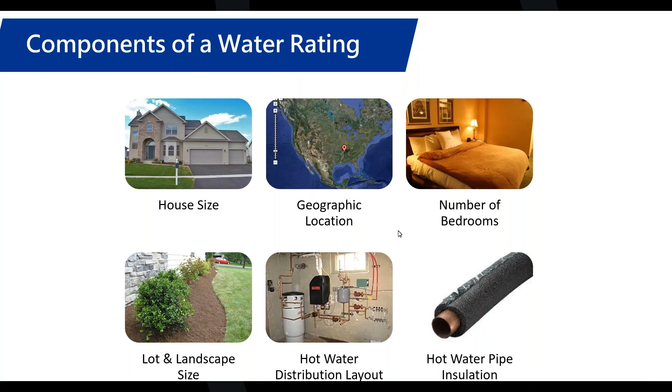Also, the shower heads, kitchen faucets, lavatory faucets, clothes washer, toilet flush volume, water softener, dishwasher, excess pressure, and irrigation, pool or spas are also considered in the water rating.

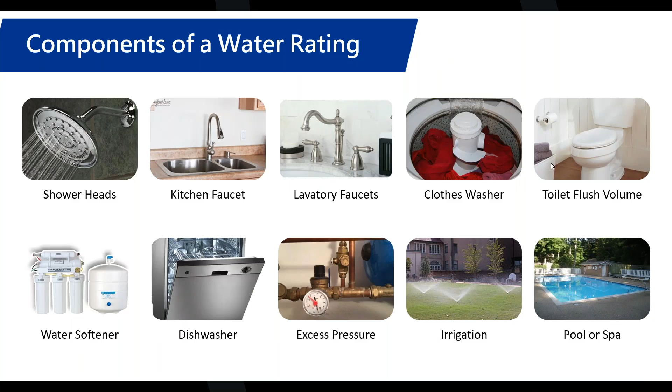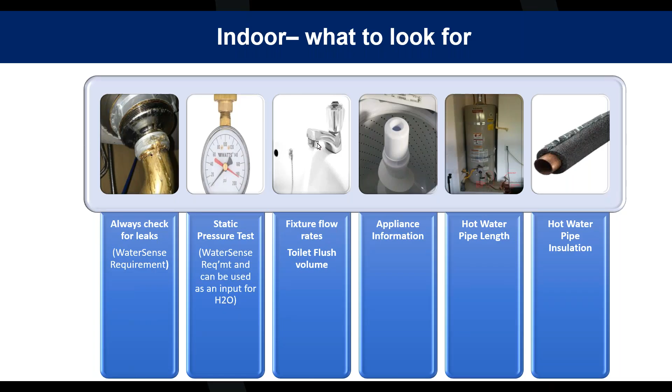So when you're doing your indoor inspections, these are what you're going to be looking for. You're always going to check for leaks throughout the house, and that is an absolute WaterSense requirement. There's also the static pressure test, which is a WaterSense requirement, but it can also be used as an input for HERS H2O. So fixture flow rates, toilet flush volume, appliance information, hot water pipe length, and hot water pipe insulation are all considered.

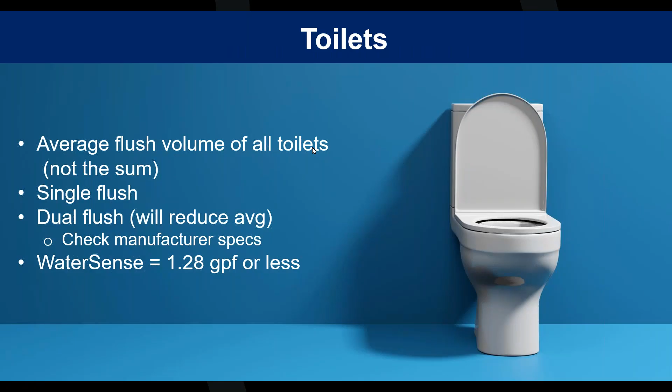So for toilets, the average flush volume of all toilets is considered. You have to identify whether they're a single flush or a dual flush, which will reduce the average. And you do need to check your manufacturer's specifications. WaterSense equals 1.28 gallons per flush or less.

Now there's two options that you have for faucets and shower heads. You record the flow rate printed on the fixture, or you find it in the manufacturer specifications. You can conduct a flow rate test for lavatory faucets. The spreadsheet allows for entry of standard or low flow, which low flow equals 1.5 gallons per minute or less.

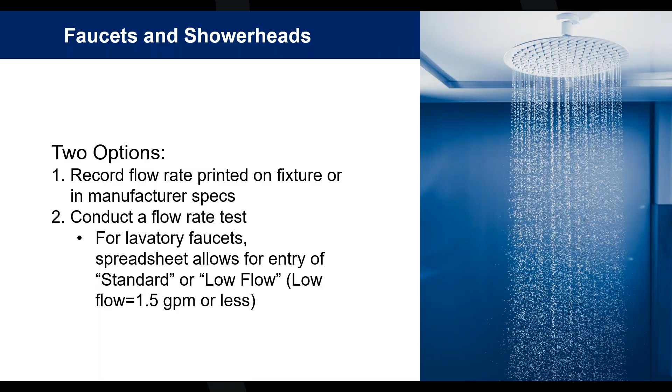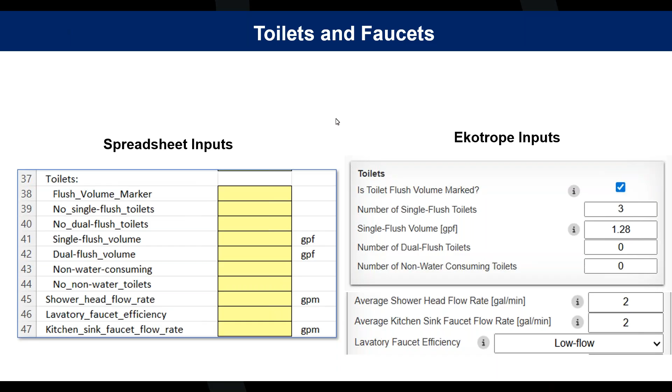Now on the spreadsheet, we put the spreadsheet inputs and Ekotrope side by side so you could compare them. And you have to be able to input the accurate information. So single flush volume is gallons per flush, dual flush volume is gallons per flush, and you input those on the spreadsheet. You identify the number of toilets and the single flush volume. And then as you go down, there's a drop box which you can click onto and select if it's low flow.

So, spreadsheet inputs: rows 49 and 50 are required, and you need to enter rows 51 and 52, or you go to the label and input 54 through 59 with the information.

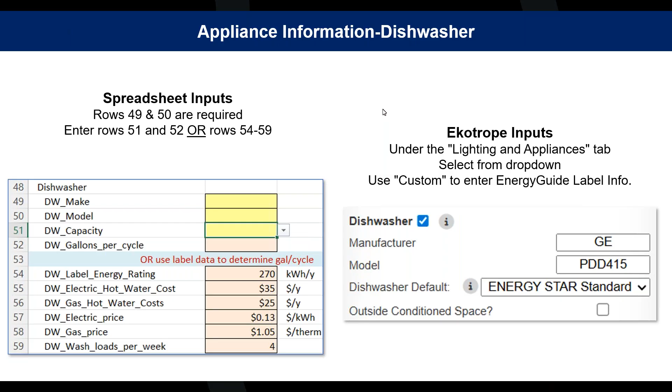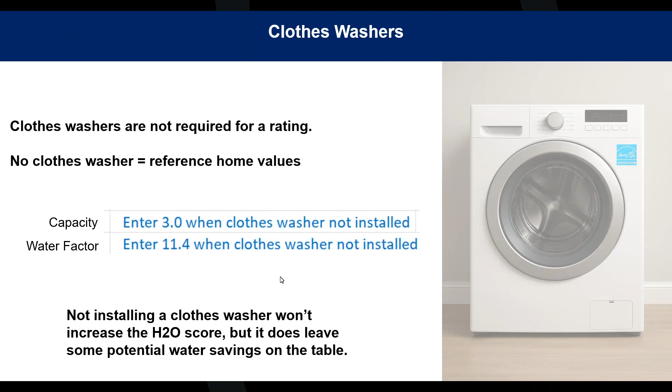Clothes washers are not required for a rating, and a lot of builders don't automatically put one in, which can be confusing. When there is no clothes washer, you have to reference the home values: enter 3.0 for capacity and 11.4 for the water factor when the clothes washer is not installed. Not installing it won't increase the HERS H2O score, but it does leave potential water savings on the table, so encouraging builders to install clothes washers might be a good thing.

And then on Ekotrope, if you are installing one, you need to put in the make, the model, the integrated water factor, and whether it's an Energy Star property and a front load. Again, you have a drop-down box where you can click the accurate information.

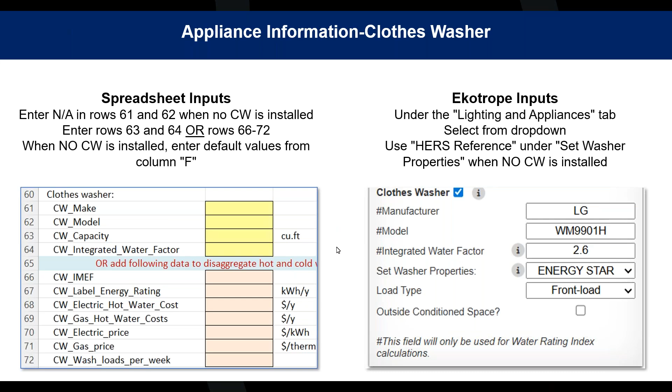Next up, we're going to discuss the outdoor inspections and testing protocols and our methods. And Ryan, I think I'm able to advance.

So what we're looking for may feel like you're a fish out of water, because most of you are used to being inside, not necessarily looking at irrigation and landscaping values. But here we're looking at landscape design, and determining through that the irrigated area. We're going to address the irrigation controllers, determine if there's a swimming pool and/or a spa, and there is an option to determine the irrigation flow rate.

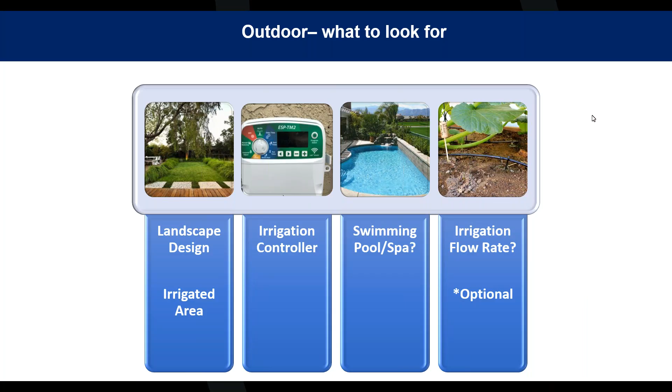So the key components of an irrigation system: what we're looking at here is the controller. A lot of times that controller is going to be in either a garage or a utility room. It requires power, so it's near an area with electricity where it can be plugged in. It's typically out of the weather since it's a piece of electronics, not usually on the outside of the home. It shows you the number of zones you've got and allows you to toggle through them, and then you determine if it's a smart controller. We'll elaborate on that in a moment.

So the emitters - I've got a better slide next that will give more indication of what you're looking at and able to identify - but those are either above ground, below ground, drip, pop up, and/or rotating.

Then your backflow device. Now, I've never seen one like what's depicted here, but I assume this is in an area that doesn't have heavy freeze. A lot of times you'll see that backflow device in a control box, and what that does is, when the system is no longer pressurized and sending water to the planting areas, it keeps that water from sucking any chemicals, pesticides, or lawn care items back into the system and getting into your potable water. So it's good for avoiding that.

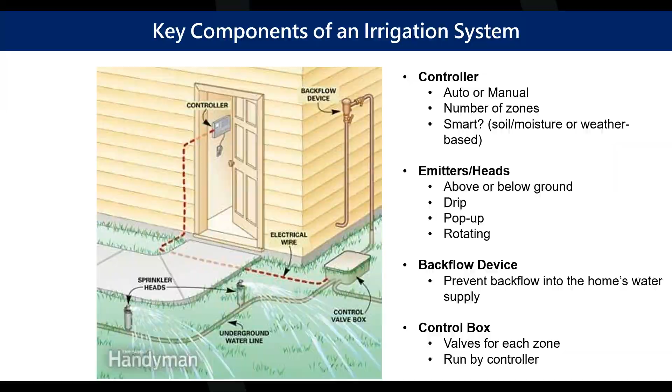So again, here's some of the examples of what you're looking at in the wild. The drip irrigation, very efficient method of watering. Essentially, you've got tubing that a lot of times gets buried under mulch to retain some of that water, and then you might see some of the emitters come up. That essentially is putting water right at the root system of the plants. Like I said, very efficient, way less evaporation.

Subsurface drip irrigation, I've never seen it, but I do know that in my area there are some soccer fields that kids are playing on these days that are watered with that. Essentially, they're putting down the drip irrigation underneath and then laying the sod on top of it to avoid what you see in the right here, those pop-ups. Those could be a real ankle buster if you're putting it into a sports field.

But essentially the one on top here, that one does pop up, and then it's kind of a static spray. You can see it's designed to get into that nice little niche rectangle there, and you do see some of that water flowing onto the hardscape there. The one below that will actually be on a rotary head that's spinning, and it allows you to shorten it, fan out, and decide the distance that water is going to throw. But these are not as water efficient because once that air meets the water, there could be some evaporation that takes place.

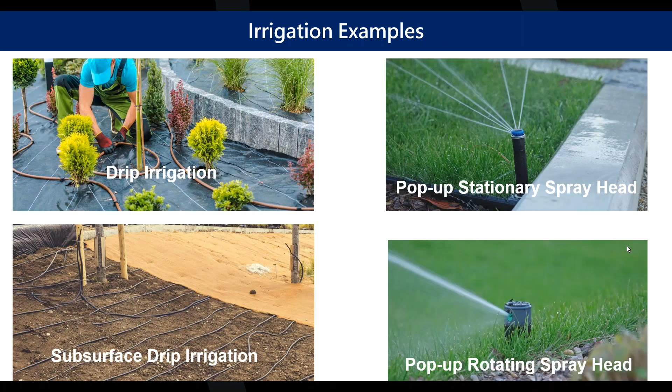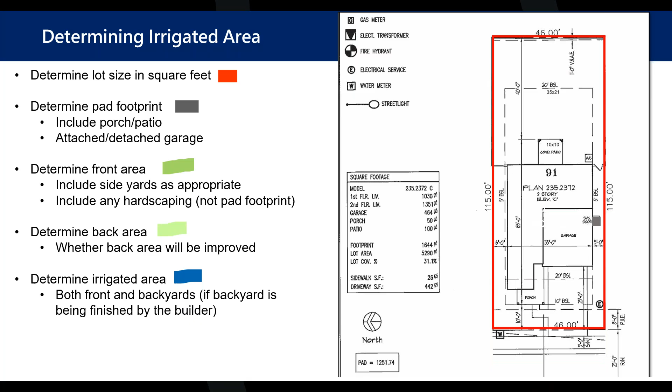All right, advance, there we go. So what we've got here is a very simple plat for us to work with. I've got two different examples of this for determining our irrigated area. So what we're looking at here is just a nice, pretty rectangle plan, and everything that's going to swoop in here - this is the perimeter of our property. Then we've got our pad footprint, so that's where the house is on the plat there. So anything that is foundation or slab, that's what this gray area is here.

And we're going to bring in our front area. So that's anything that's including our hardscape, our landscaping that is going to be irrigated, your driveway, sidewalk, any retaining walls, things like that are going to be included in this front area. So that's the wholesale - everything that's how you determine where the front area is. And then we've got our back area here, same thing - it's just everything that's in the back that includes any of the area back there.

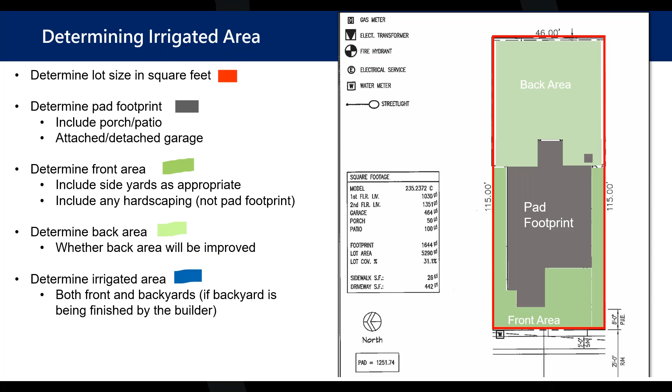And then this, it's a little globulous, you can see. So what this is broken down to is anything that you're expecting to be irrigated - it's either planting beds, it can be the entire swath of lawn, but this is just kind of broken down so you can get your mind around where you're going to measure.

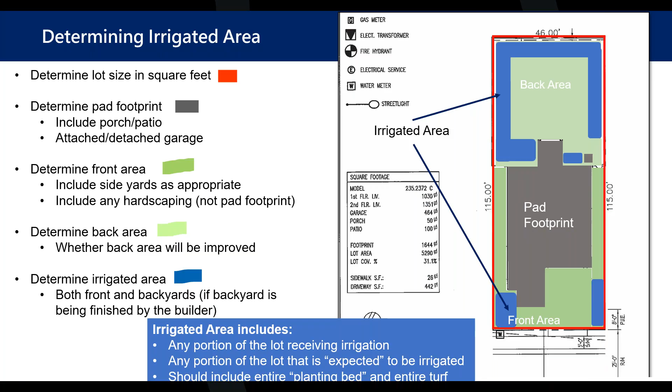So when you're looking at any portion of the lot that is expected to be irrigated, like I said, with those pop-up emitters, you're not just going to measure and stop there, because there is a throw that water has. So determining that - sometimes you're going to have to estimate, but typically where they're placed, they're going to have a radius or kind of a flat line where they're designed to reach. And a lot of times they'll be spaced so that they have a little bit of overlap. So when you find that last one in the row, go ahead and add a few extra, maybe 10 or 12 feet on the outside of that radius to make sure you're as accurate as possible.

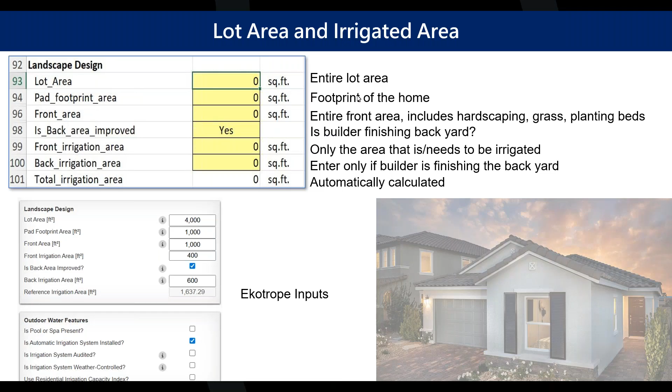Sorry, I had to clear my throat there.

On the right side you see our legend here. What we're going to go with is pink is our entire lot area. That pink is the perimeter outside, covering the entire perimeter of our yard.

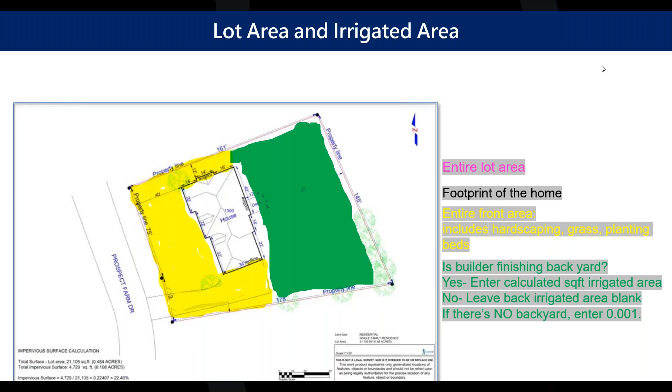Then we've got in black the footprint of the home. The yellow is the front area, which includes everything hardscaped, plants, lawn, sidewalks, retaining walls. Then the back area does take a little thought and conversation, depending on whether your builders leave it up to the homeowner to finish. Sometimes they just come and throw straw down and seed it to keep the soil in place, but if it's a more custom design, that backyard may be fully landscaped, lawn and plantings included in the house package. We'll go over the fields and how you determine that as we go forward.

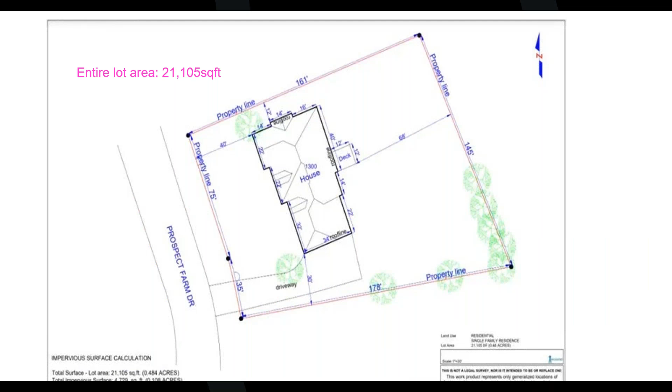So what we've determined here is that our area of the entire lot is 21,105 square feet. Please don't do the math for me here, this is just for the sake of the process. We're going to enter it in this top line, the lot area field.

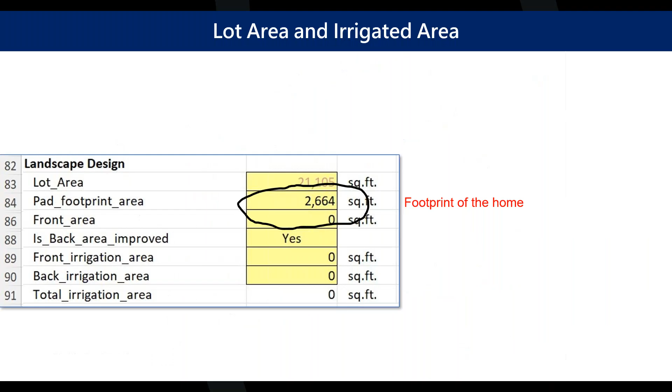Next up, we've got the footprint of the home, which I've determined to be about 2,664 square feet. That's going to go in the second field. Notice that 2,664 square feet is less than the lot area, so the lot area should never equal the pad footprint. That's the entire yard versus the size of the home, that's where we're getting that major difference.

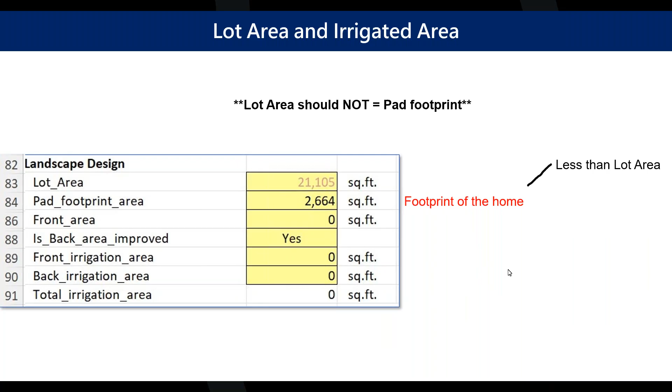Next up, we've got our front area, which I measured to be around 6,686 square feet. That's going to go into the front area field here. Again, that's everything included.

Now what we're going to subtract here, you can see I kind of blanked out the driveway. That was really the only hardscape item here, but we're assuming now that this builder is going to put in grass or lawn of some sort, and it's going to be irrigated everywhere that's either hashed or colored in yellow. Where I am in the southeast, and a lot of places similar to where we are, builders typically are putting sod in the entire front yard. They'll have their required plantings around the foundation, and maybe drop a tree or two that'll take about 40 years before it casts any real shade.

But that's where we're looking at removing the hardscaping, and the more lawn that's irrigated, it's going to lead to a higher HERS H2O score. Keep that in mind as you discuss with the builders. Push them towards larger planting beds, sometimes a little more xeriscaping rather than just a huge swath of lawn, if they're having trouble hitting the HERS H2O numbers they're looking for.

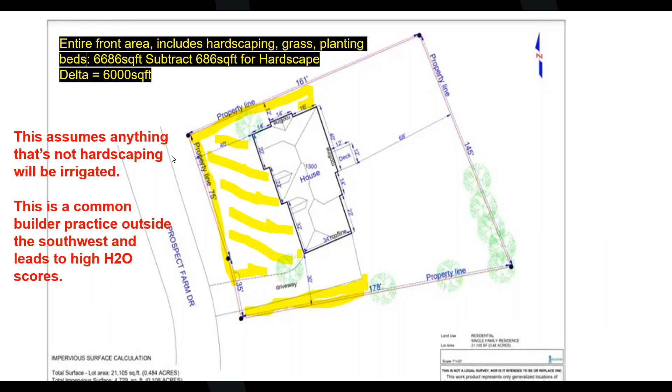So once I've subtracted out that hardscape, we come up with about 6,000 square feet. That's going to drop into this field here.

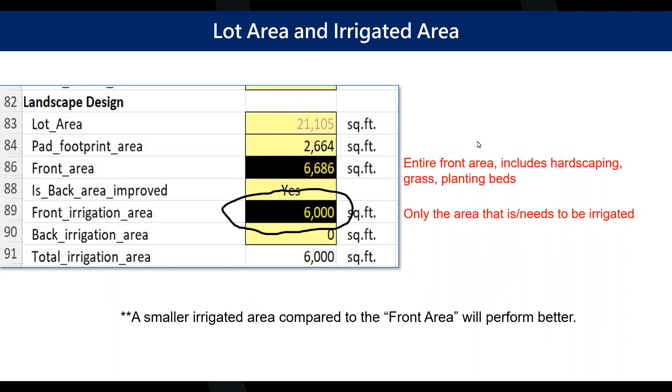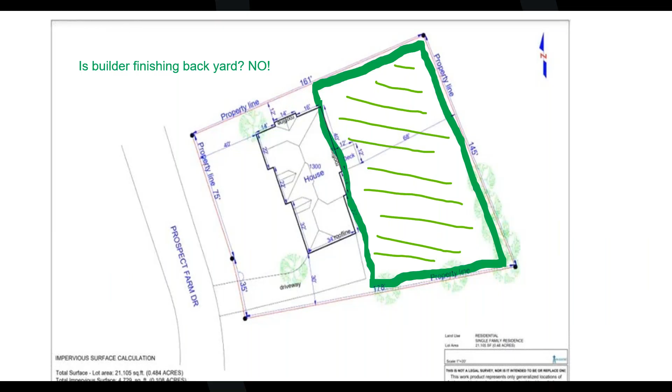And then next, with the back area, we're going to assume here that the builder is not finishing the backyard and leaving it up to the homeowner. So like I said, they may throw some wheat straw down or hay, and then handfuls of seed to lock the soil in place if possible. That's going to enter this field here on the right. So if they are not finishing the backyard, you're going to input 0.

Now in the case where there's zero lot line and there is no actual backyard, you're going to type in 0.001. It will still show a 0 in that field, but that 0.001 allows the program to recognize that you identified there's not going to be a backyard, and it just allows the calculations to be a little more accurate.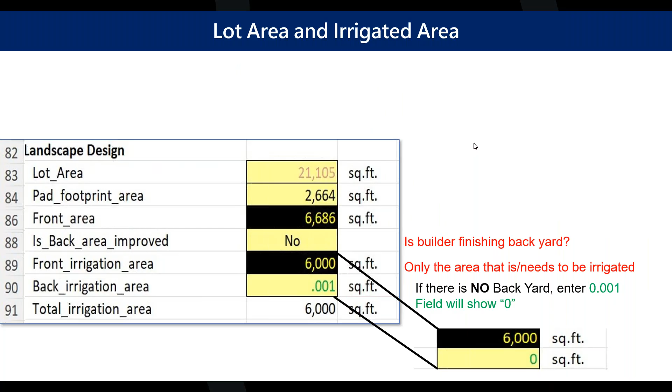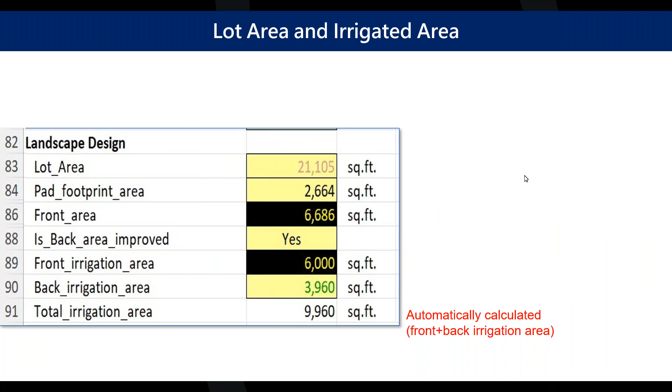All right, so assuming that the entire backyard is irrigated, we've come up with 3,960 square feet here. We're going to enter that in here, and you can see the calculation is automatically done down below, 9,960 square feet total. That's our overall irrigated area for this property.

Back to our controllers. Once you've identified where the controller is, you want to identify if it's a Wi-Fi enabled smart device that works through weather patterns. A lot of these smart controllers with a Wi-Fi module installed will track your weather patterns and trigger accordingly. If there's a scheduled irrigation and it rains during that schedule, depending on the amount forecast, the controller will actually keep the irrigation system from coming on.

I'm sure anybody who's seen an irrigation system running in the rain, if you have the same feeling in your gut that I do, understands it's a nice thing to have these sensors. Otherwise you're just pouring potable water down the drain post rain, and the plants aren't really benefiting any additional from that. So again, some of these fields are optional.

They're all optional, but you must select yes or no. They do not have to have any of these — they don't have to have a pool or a spa — but you just want to make sure as you go through that you are checking yes or no on whether any of these things exist.

And then RICI is an optional field at the bottom. You're essentially testing the irrigation flow rates, but that is not required. You can have a professional irrigation audit as another route to get a little more accurate, but none of those are required. They just might help the HERS H2O score drop down a little bit more.

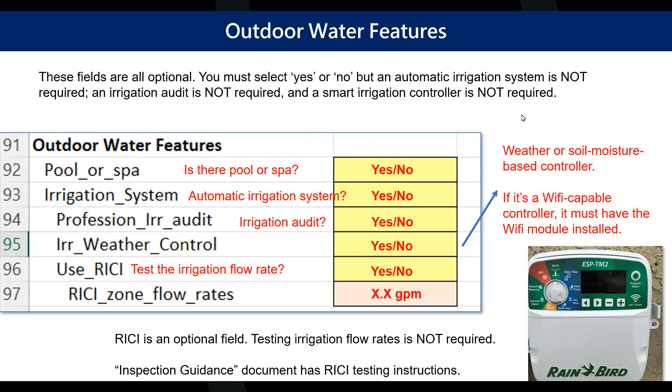So what if the builder is only landscaping in the front yard? We discussed that — either there's no backyard, or they're not going to touch it. The front yard must be landscaped to complete a HERS H2O rating. In the picture example here, that's a lot of xeriscaping, but there is some planting there.

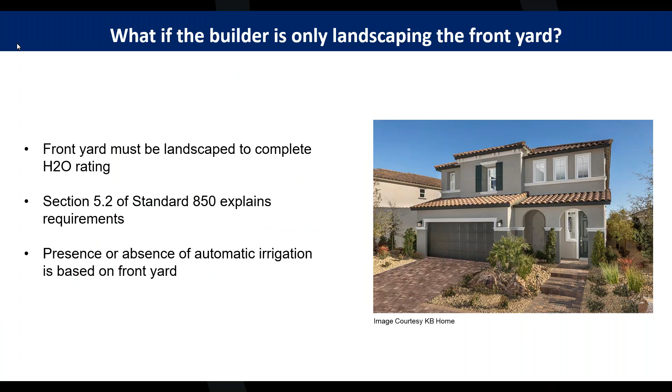So if you walk up and there's no irrigation system installed because it's fully xeriscaped and they're not using any irrigation, then you're not going to be able to complete based on section 5.2 of the standard 850 requirements. So typically the presence or absence of an irrigation system is based on that front yard — that's where you're going to take a look and start looking for that irrigation system.

Now the impact of indoor versus outdoor use is a little different as you move around the country. For those of you in cold, wet climates, you're actually going to see a better HERS H2O score based on interior fixtures because there's not as much water use outside. But in hot, dry climates that require a lot more intensive water use to keep those plants alive, you're going to see a smaller impact from the inside.

So you have to work really hard with those builders sometimes to get them to adopt xeriscaping. And if they're trying to put a golf course in the backyard of a house in Arizona and it's going to be irrigated, their HERS H2O score is probably just not going to be all that attractive based on that.

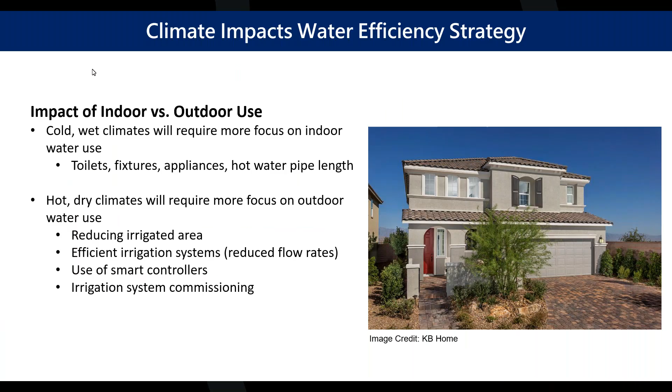Here's a little chart describing what I just said. In Duluth, Minnesota, annual water usage is about 60,000 gallons, versus Phoenix, Arizona, at 140,000 gallons. Indoor water usage in Duluth is around 80%, versus Phoenix, where it's only about a third, because the other two-thirds is being used to keep those plants alive. So your water savings from installing WaterSense labeled plumbing fixtures in Duluth is going to be a higher percentage versus Arizona, where it's only 4%.

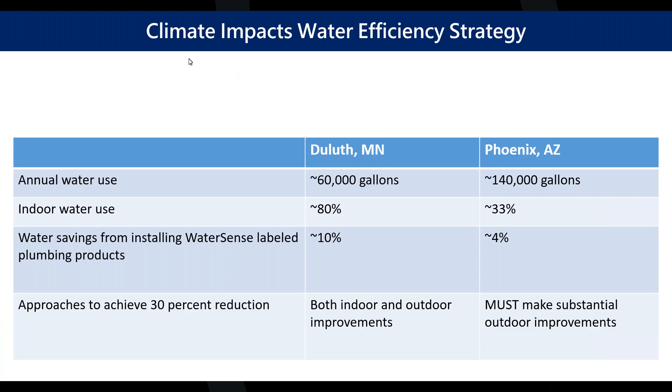So the approach is to achieve that 30% reduction. In Duluth, you're going to be able to account for that in both indoor and outdoor improvements, but in a location like Arizona, you're going to have to make big strides and substantial outdoor improvements to reach that 30% reduction.

All right, thanks Michael. I'm going to do just a brief overview on WaterSense and how HERS H2O relates to that, and then I'll get into more detail on some of the new standard and multifamily as well.

So for WaterSense labeled homes, believe it or not, we just last year still had some questions on version 1, which was sunset four years ago now. Version 1, which many raters are still familiar with, was a prescriptive based labeling option. Version 2, which we're under now, is a performance based approach where you can use HERS H2O for home certification. You do have to get a score of 70 or less to qualify for WaterSense.

There's also a few mandatory items, and Paulette mentioned this at the beginning, that you do have to install WaterSense labeled fixtures. That includes toilets, shower heads, and bathroom faucets. And you do have to check for leaks throughout the home during the inspection.

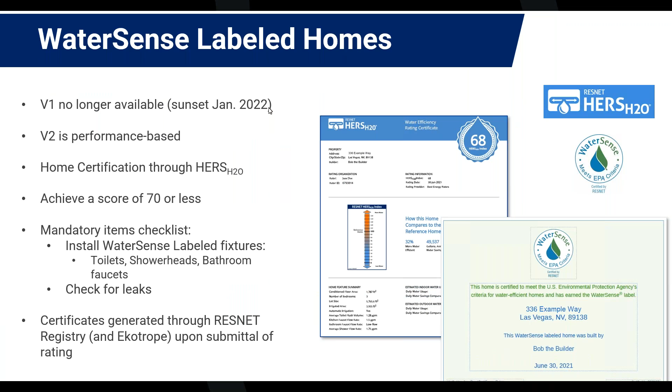The certificates that you see here on the right side of your screen are generated through the RESNET registry. They're also generated through Ekotrope once the rating gets submitted to the RESNET registry. If you're using the spreadsheet, these certificates are going to be emailed to the email listed as the rater email on the spreadsheet. And if you're using Ekotrope, they'll be generated as you normally would expect a home energy rating certificate to be generated through Ekotrope.

I want to cover a few areas where builders are struggling to achieve WaterSense, and one of them is large irrigated areas. As Michael was saying, this is primarily an issue outside of the Southwest. There are very strict requirements in the Southwest as well as California on outdoor water use. One of the things we see happening with builders in other parts, from Texas to the East Coast, up into the Midwest and Northeast, is that the standard practice is to essentially put turf grass anywhere that there's not hardscaping, and then in turn they also irrigate that as well. So you have a very large irrigated area, which really hurts the HERS score. So reducing the irrigated area is one way to drive down your HERS H2O score.

Using drought tolerant plants that don't require much, if any, irrigation is another option, and also non-grass surfaces. This is more accepted in places like Arizona and Nevada, where you may see mulch or stone, or in some cases artificial turf. One of the homes that was part of a demonstration during the RESNET conference had artificial turf in the backyard with very limited irrigation done through drip irrigation. Placing turf grass in shaded areas also helps reduce the water intensity needed to keep that grass alive, and working with a landscape designer is certainly a good step for builders to figure out how they can reduce their outside water use.

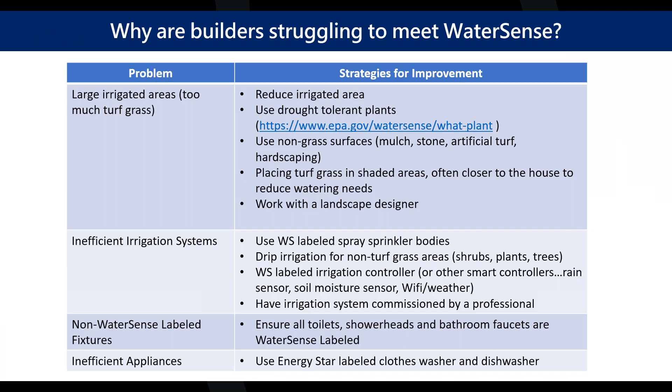The other one is inefficient appliances. Energy Star labeled clothes washers and dishwashers will not only give you credit on the HERS side, but also on HERS H2O. For the most part, if it's not standard practice for a builder to install a clothes washer, which we don't see commonly, it's unlikely they're going to choose to install one just to achieve WaterSense, but it is one way they can help reduce water usage. As Paulette mentioned, the clothes washer is not going to increase your HERS H2O score, but you lose a lot of water saving potential by leaving it at the reference home values for the calculations.

Now I'm going to get into standard 850/2025. This has been approved by ANSI, approved back in April of 2025. The final publication process is happening through ICC and should be available very soon on the ICC website. A few changes I want to highlight here.

This new standard adds multifamily home type. That's probably the biggest change, since the 2020 version of the standard was limited to 1 and 2 family dwellings. Now we can start to do multifamily.

It also adds some fields for gray water when it's used for toilet flushing. And there are some revisions to the outdoor water use calculations that impact single family.

The HERSH2O calculation spreadsheet is in development. As Michael mentioned, the old version is going to be phased out this year, and Ekotrope is aiming to support the new standard by July. You can see the screenshot on the bottom where the gray water fields will be added into the new version of the spreadsheet. It's still under development, and we're hoping to have that out by early summer.

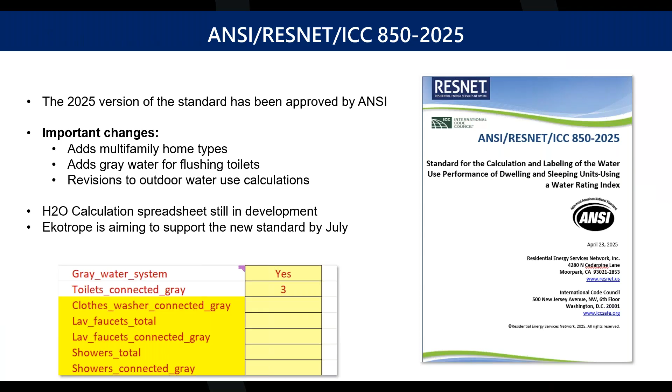Now for multifamily, as I mentioned, there are some differences. As far as the indoor water inputs, they're all going to be the same as for single family. The calculations are a little different in terms of occupancy assumptions, but the inputs themselves on the indoor side are all the same.

There are some new fields in the updated spreadsheet. This includes a sample set ID field that applies to both multifamily and single family that uses sampling. There's also a drop down for home type where you select multifamily or single family, and an input for the number of units on the property. So if there are 5 buildings on one lot, you would enter the total of all the units in those 5 buildings on that lot.

This is really important because it's going to impact your outdoor water calculations, and I'll show in a second how that happens.

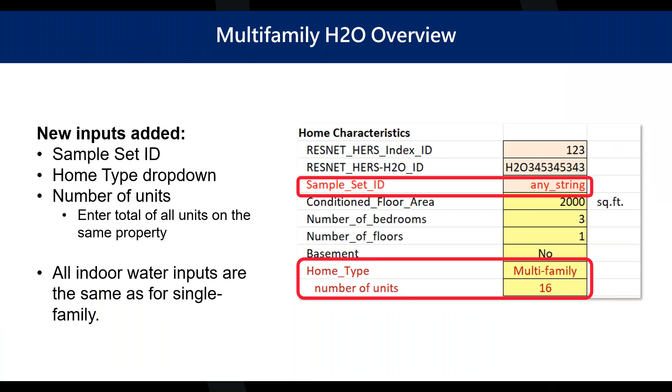For the outdoor HERSH2O calculations, there's going to be a new tab on the spreadsheet, and I expect Ekotrope will probably pick this up in their help tabs. There's going to be a new instructions tab that provides guidance not only for multifamily, but also for single family issues where we've seen problems over the last few years and get a lot of questions. That instructions tab will help provide additional guidance on the inputs in the spreadsheet.

When looking at a site plan for a multifamily property, just like single family, the lot area is going to be the entire lot that those buildings sit on. The inputs for the calculations are the same as for single family, but the way you conduct the calculations is a little different.

For multifamily, you're going to sum the pad footprint for all of the buildings on the property, then subtract that pad footprint from the lot area, and cut that in half — that's entered as your front area input. Then you'll calculate the irrigated area, divide that number by 2, and enter the result in the front irrigation area and back irrigation area to give you the irrigated area for that property.

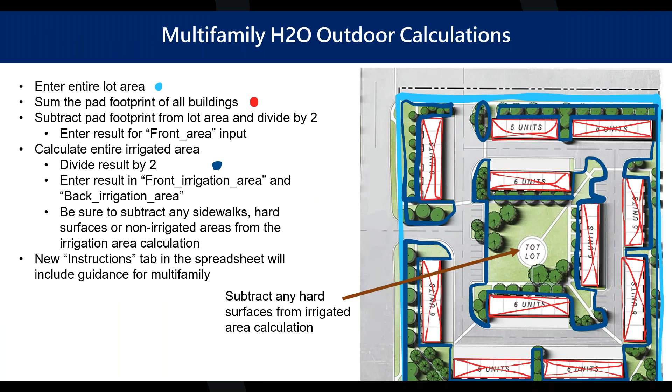A few things I want to point out about multifamily outdoor calculations: one is that the reference home irrigated area is always going to be the same as the rated home irrigated area, so you're not going to receive credit there for reducing the irrigated area.

We had a separate working group as part of SDC 1100 that tried to tackle the outdoor calculations for multifamily. One recommendation they came up with, because of the variability in types of multifamily properties — an urban property might have almost no irrigated area, while a suburban property may have large irrigated area — was to keep the reference and rated home irrigated area the same. But there are still other ways to improve the HERS H2O score for outdoor use in multifamily.

One of those is a professional irrigation audit; using a soil moisture or weather-based irrigation controller will also give you credit. And finally, the overall irrigation flow rate using RICI, the Residential Irrigation Capacity Index. As far as inputs, it's just the gallon per minute flow rate of all the irrigation zones for the property.

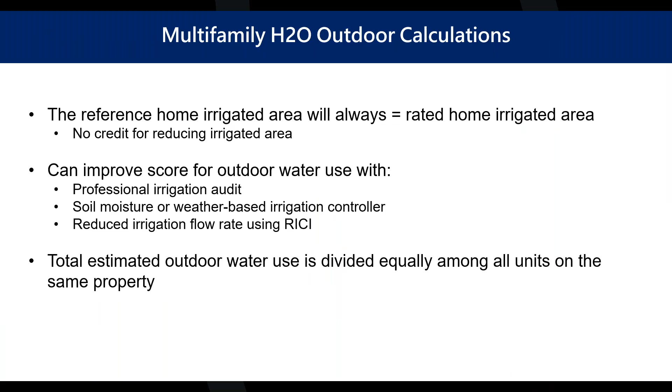For launching HERS H2O multifamily, the calculation spreadsheet is being updated. There will also have to be a WaterSense HCO review, so we have to get the multifamily target scores determined for WaterSense on the multifamily side, and that review is pending completion of the calculation spreadsheet so WaterSense has a chance to analyze that and determine the target scores. As I mentioned earlier, we expect multifamily HERS H2O ratings will likely be rolled out sometime early summer.